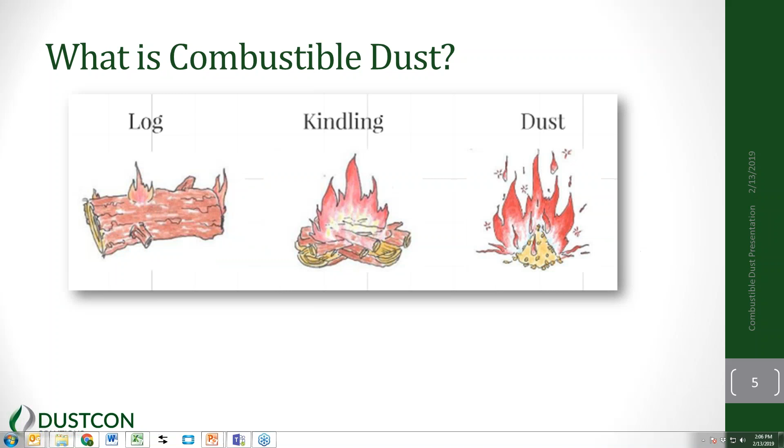All right, so let's jump right into what is combustible dust.

A good analogy for the combustible dust problem is to envision a log burning, maybe in a fireplace at home or at a campfire. Most of us have experience with this. We understand that the log burns, it gives off heat over a long period of time, but it's not particularly easy to ignite. You can't just take a match and light it up immediately. So what we end up doing is we chop some of that wood into smaller kindling, or we find some leaves or something with a little more surface area, something we can use a match to light. It gets going and provides that starting heat for the log to begin burning.

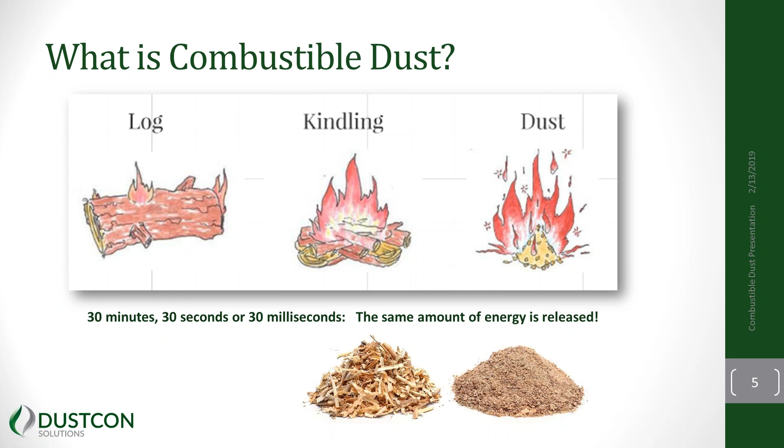Now, if we extrapolate that out even further, we talk about chopping that kindling down into a real fine powder or a fine dust. We go out to the parking lot, disperse it into the air, and light it up. You'll see that it ignites and burns almost immediately. That's because the amount of surface area plays a huge role in how quickly that occurs. So the key thing is that it's about how much mass there is within your combustible dust that determines how much energy is released. And if you release that energy much more quickly, it's going to do more damage.

So when we define what a combustible dust is, you'll see that most publications will talk about the range below 500 microns as what we consider to be dust. So if you've got a finely divided particulate solid below that 500 micron level that can burn, that can pose a flash fire or explosion hazard when it's suspended in air, that's what you're going to be labeling as combustible dust. Now this can be any number of things.

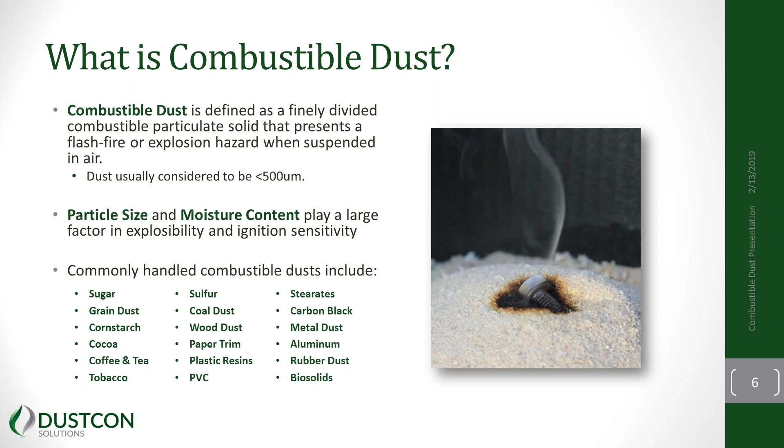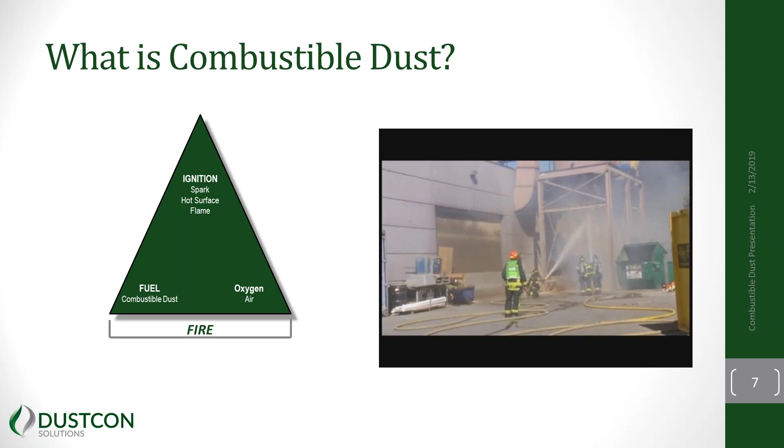What you're going to see now is we add one more leg to what we call the combustible dust pentagon, and that's dispersion. The water jets that they're using have actually allowed the combustible dust that's already burning to be dispersed in the air below that vessel. And it creates this flash fire, right? You can see the power of it. You can see how these guys are engulfed immediately. Now, luckily, they're wearing their fire retardant gear, and they're able to survive this incident. But if, let's say, the firefighters aren't wearing their PPE, that could be a real problem.

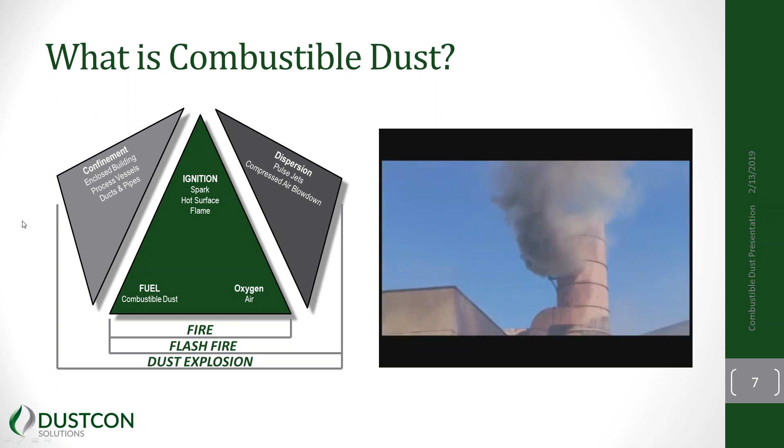But this still isn't what we call an explosion. And the reason for that is that an explosion requires confinement. It requires a vessel, a building, or a compartment to be ruptured. And that comes from the pressure that's generated within that confinement. So this is going to be the key thing that we remember as we go through the hazard analysis process of the combustible dust story.

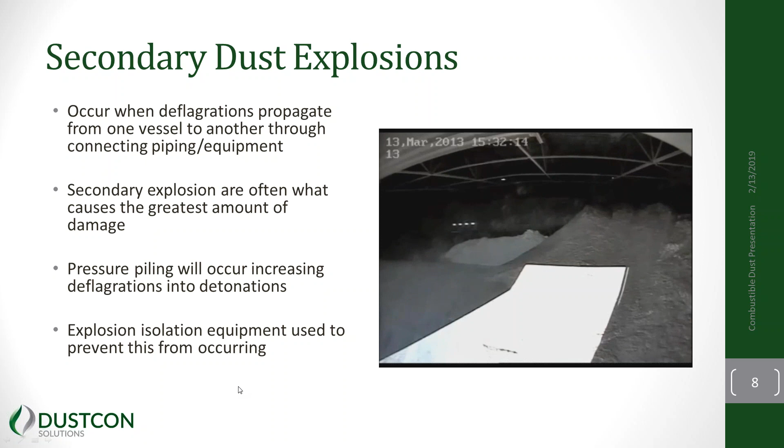So taking a look at secondary explosions, this is another thing that gets widely talked about when it comes to combustible dust, because it's not the primary explosion that typically does a lot of the damage, it's the secondary. Taking a look at this video, you can see the way the flame ball comes out of where it originates, you can picture that vessel there in the way far back of the frame. It's very difficult to see where the flame ball originates. You can see that it travels all the way across this warehouse where you've got fine wood dust being stored. And on top of those rafters, all that material is shaken loose. It falls into suspension by that pressure wave that precedes the flame front, and it's going to entrain itself into the air so that there's more opportunity for propagation.

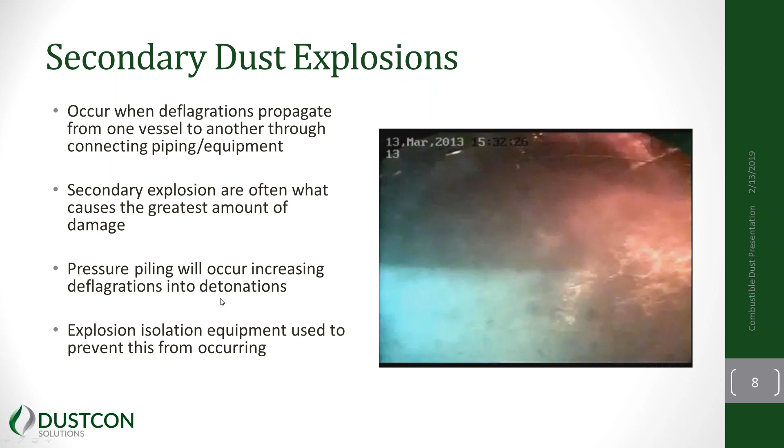Now, you may see 1/32 of an inch, 1/16 of an inch. These are different measures that are defined by the NFPA guidelines or other guidelines telling you how much you need to watch out for.

Me personally, if I can write my name in it, if I can't see through that layer of dust to whatever the underlying equipment or handrail is, that's when it's time to take a look and make sure our housekeeping is in order and we're getting it taken care of.

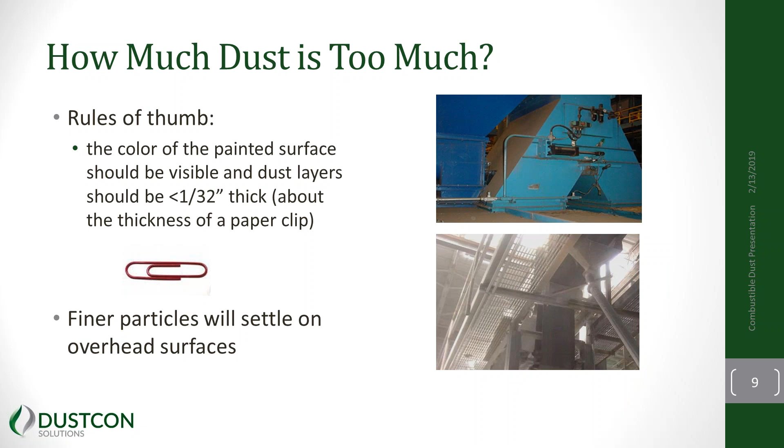Finer particles are going to be the ones that are actually more dangerous. As noted earlier in the presentation, the more surface area you have, the quicker combustion is going to occur, so the more dangerous that dust is going to be. It's those finest particles that actually suspend up into the air and settle out onto the rafters, above overhead equipment, and things like that.

So, are there any questions regarding the basics of combustible dust? If you have any, please ask them here in the questions tab, and I can answer them later on in the presentation.

We're going to move on to NFPA and what the requirements are there. Those of you here in North America will remember that in 2008, when the Imperial Sugar explosion occurred, this happened, ironically enough, just after OSHA issued its first national emphasis program on combustible dust.

The CSB, or Chemical Safety Board, and other agencies have been doing a lot of work collecting data on the loss history of combustible dust in our industries. OSHA had taken note, put out its first national emphasis program prior to this explosion, and then reissued that national emphasis program after the Imperial Sugar disaster occurred.

Now, since then, they've been citing the NFPA documents and the general duty clause as the ways in which they're enforcing this. Internationally, you may be looking at building codes, or if you're in Canada, maybe your province-specific safety agencies, and they're also going to be focused on the NFPA standards. If you go over to Europe, you might be looking at ATEX or some other standard as well. But for that reason, we're going to focus on NFPA 652, which is the newest document that's been released with regards to combustible dust.

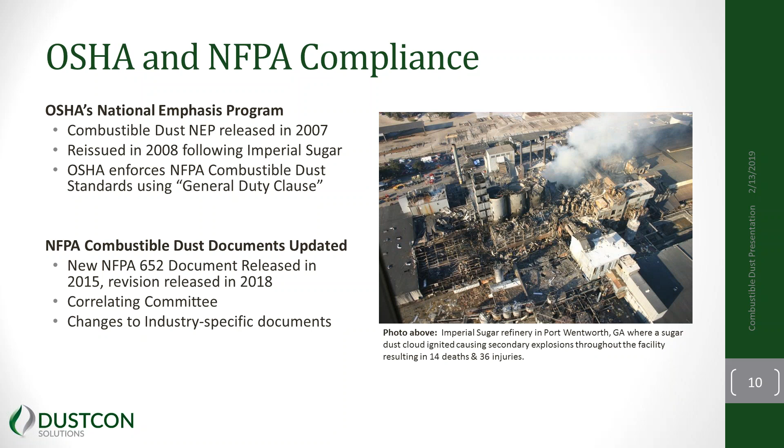So when we talk about the requirements for NFPA when it relates to combustible dust, we're going to focus on a couple of things. First, you're going to determine whether or not the material you're handling is combustible, using Chapter 5 to do that. Second, you're going to want to identify and analyze all the hazards that you have related to combustible dust. That's where the DHA comes into play, that's Chapter 7, managing those hazards using a combination of engineered and administrative controls.

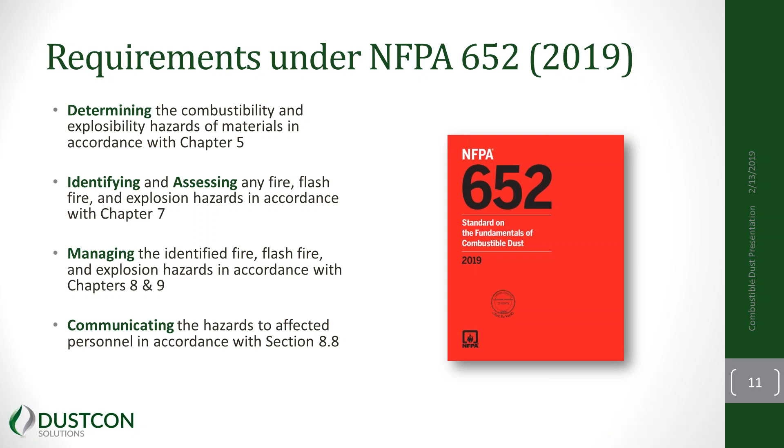We're going to take those identified fire and explosion hazards, and we're going to do something about it. And then finally, we want to communicate the hazards to the affected personnel. We want to train our employees, make sure contractors are aware of what's going on. That's going to be the best way to prevent incidents moving forward.

So there's two ways to determine whether or not your material is combustible or explosible, through Chapter 5 of NFPA 652. The first is using industry published values. You can see here on the right, this is just a couple of the values that you might find for plastic dusts coming out of the NFPA 652 document. As you can see, they provide you with your Pmax and your KST data right there, and it lets you know what the median diameter of the particle was, so that you can make sure that the material you're handling is going to be represented by that data.

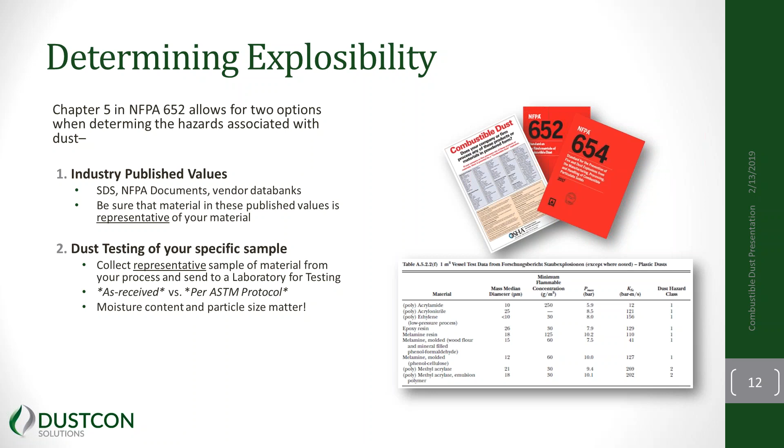Now, the other way to do this, if you cannot find data that works well for you in the published values, is to test your dust yourself. This is going to be important, especially to make sure that when you test that dust, it's representative of what you're actually handling. We don't want to just take a scoop out of the super sack that's coming in if there's a chance the material could be degraded downstream, or that there's going to be mixing involved. It's going to be very important that you work with us at DustCon Solutions, or somebody else who's got knowledge of the specifics of combustible dust hazards, to ensure that you're testing this material appropriately.

You can do it as received or per ASTM protocol. Those are things that you're going to want to get into—do you have good control over particle size and moisture content, or should you be looking at a worst case scenario for your dust?

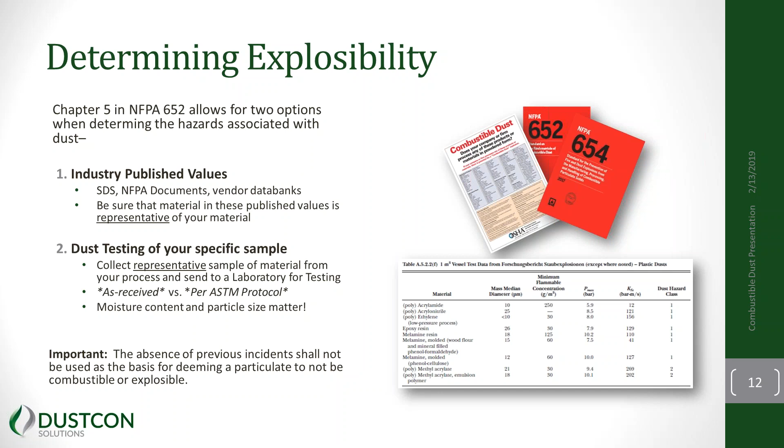It's important to note that the absence of previous incidents should not be used as the basis for saying that your dust is not combustible. Just because at your sawmill you've never had an explosion doesn't necessarily mean your wood is not combustible. It's simply not the case.

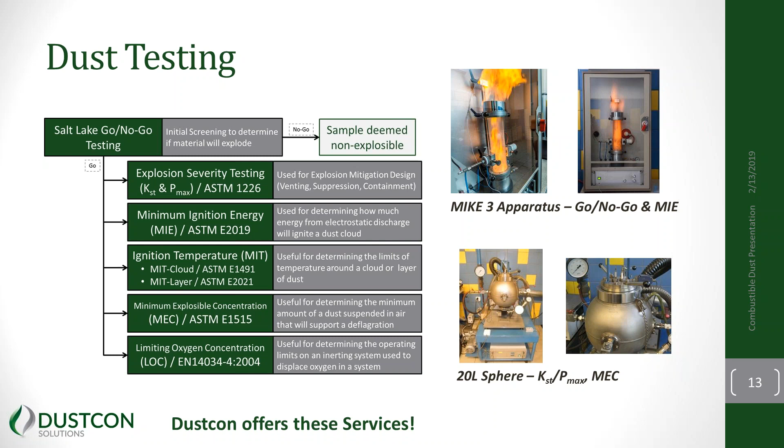A dust hazard analysis is the next part of that NFPA requirement in identifying and analyzing your hazards. A dust hazard analysis is simply a review of your process, going through each point, each room, each vessel, determining where your explosion or fire hazards are possible, and identifying at what points you've got safeguards in place already versus where you need additional safeguards.

The term dust hazard analysis was coined by the NFPA 652 committee, done so to distinguish it from the process hazard analysis associated with OSHA's PSM. It's a retroactive requirement for all facilities, regardless of when the facility was built or what the standards were at the time. That means all facilities handling combustible dust now must have a DHA completed by September 7th, 2020. However, in the food and wood industries, those specific documents have carved out later dates for their constituents to have the DHAs completed.

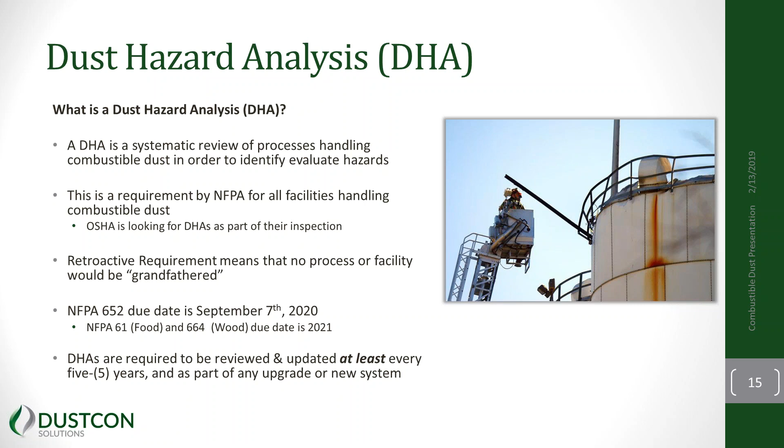Additionally, you're going to want to update those DHAs at least every 5 years, or if you make upgrades to your system or add a new system.

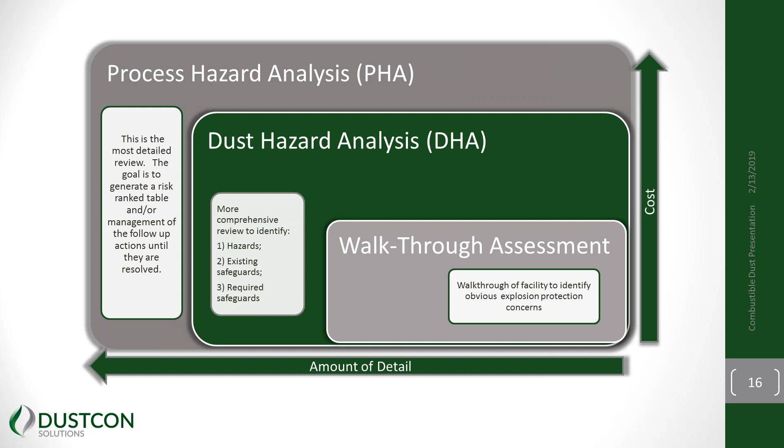A DHA is going to be different than the process hazard analysis found as part of OSHA's PSM, but it's also more than just a walkthrough assessment you might get from an explosion protection manufacturer. The DHA focuses not only on the equipment in the plant, but also on your administrative controls like training, hot work permitting, things like that. So it's going to be a little less detailed than a process hazard analysis, but more detailed than just a walkthrough assessment.

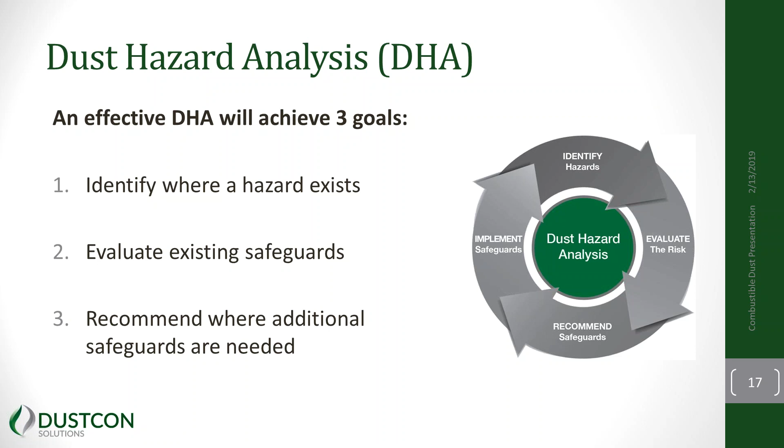The steps to a DHA: we're identifying where the hazards are, evaluating what existing safeguards are already in place, and then measuring whether or not those existing safeguards are adequate to meet the risk level you're looking at. Recommendations are made, and those recommendations should ultimately be implemented. We do it in a cycle every 5 years.

A dust hazard analysis should be done as part of a team. We want intimate knowledge not only of the regulations and the hazards themselves, but also of the process being analyzed. So you're going to want to use your plant engineers, sometimes your operators, sometimes your maintenance, your safety staff, your administration. But you should always have somebody leading the effort who's what's called a qualified person.

A qualified person is kind of an ambiguous term set out by the NFPA. In their words, it's somebody who has experience with combustible dust hazards and has experience leading a DHA. So it's not like you can just ask for a certificate from people who might be offering to work on your behalf as the DHA qualified person—you really need to look at the credentials of the person you're going to hire. In most cases, it makes sense to hire an expert, since smaller organizations often don't have the resources for somebody to be an expert in the field of combustible dust safety.

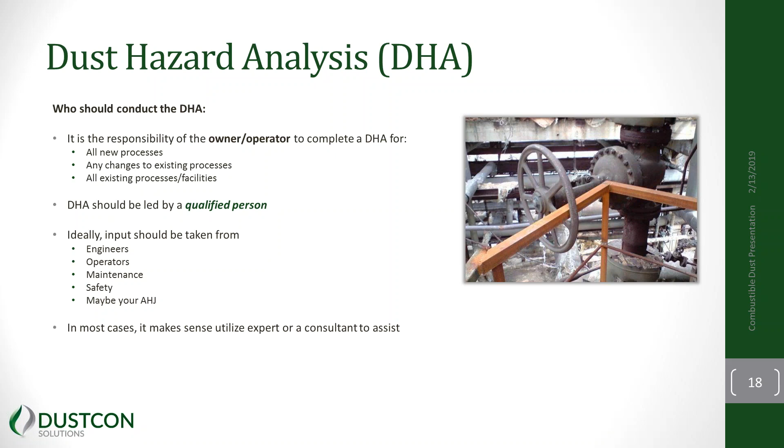So it's very important that you ask for references, for sample DHA reports, and check out the accolades that the person claims when they're asking to work on your behalf to complete a DHA.

When we go through the DHA process, this gives you an idea of some of the more common places we're going to be looking to find hazards, at least when it comes to vessels that we're looking at. The data on the left comes from FM's property loss data sheets published in 2008.

They show that over half of incidents involving combustible dust, fires, and explosions involve the dust collector. And the reason is we've already got 4 of those 5 legs of the combustible dust pentagon present at any given time. We're bringing in our combustible dust with air, our oxidant. We're enclosing it in the dust collector, and in most cases, we're using pulse jets to shake that dust, to disperse it into a cloud.

So all it takes is that ignition source to get into the dust collector, and there you go, you've got your incident. Bucket elevators, mills or grinding equipment, storage silos and bins, spray dryers—these are all going to be very common places that we're going to be looking for combustible dust hazards within the process itself.

And then over on the right, we've got a list of ways that we can mitigate those deflagration hazards. You can think of things like explosion venting or flameless venting, which are passive approaches. You can look at explosion suppression, which is a way to put out that deflagration before it has a chance to build enough pressure. Oxidant concentration reduction, sometimes thought of as inerting, using nitrogen or carbon dioxide or argon, something to keep your oxygen concentrations low enough that you can't support a deflagration in the first place.

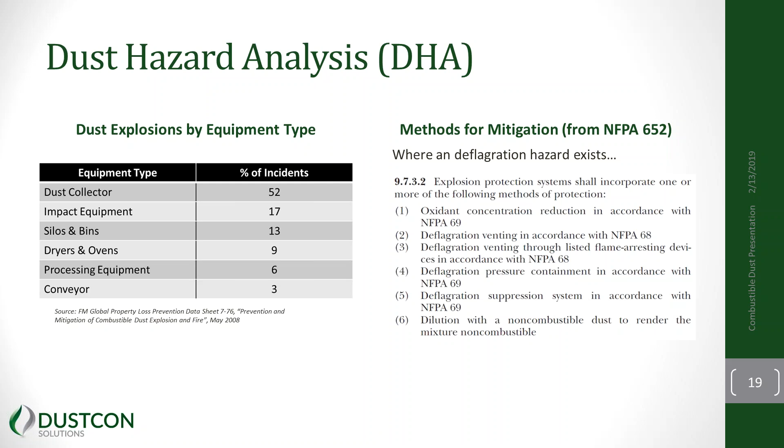So what I want to do now is just quickly go through an example of how you might analyze one particular node within a dust hazard analysis. You can see here I've chosen a central dust collector pulling off of a blending or a polyethylene pellet production and blending process. You can see that we do have combustible dust being pulled into this dust collector.

We've got it confined and suspended, as I mentioned, with the pulse jets. The MEC within a dust collector like this is almost always going to be exceeded because those finest particles are being kind of recycled into and out of the filter bags.

And then we take a look at what our credible ignition sources are. In this particular case, the additives used in the compounding process are going to have pretty low MIE, or minimum ignition energy values, meaning that the risk for static ignition is actually moderate. If we have an electrostatic discharge, we could end up with ignition.

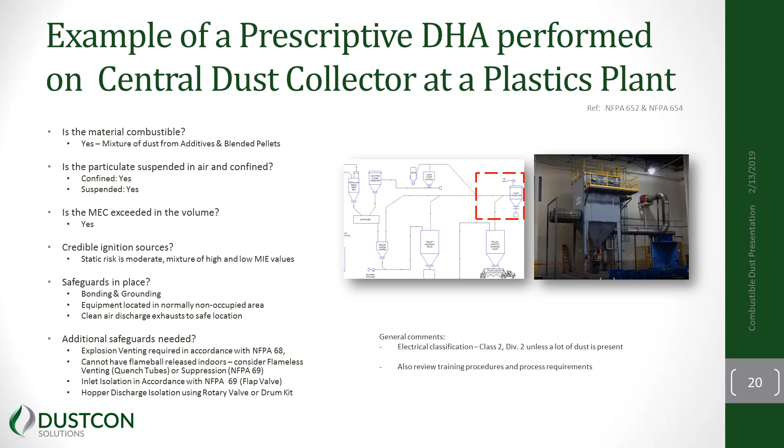Some other things to think about: you want to take a look at those procedures and make sure that hot work permitting is in place. Also, how well is this dust collector sealed up? Do we need to classify the area if there's lots of fugitive dust escaping, creating maybe a Class 2 Division 2 environment?

Some other things to consider—we talked a little bit about housekeeping earlier in the presentation. Management of change is a big one I've not touched on recently, but managing your changes is going to be crucial in making sure that additional hazards are not added in between the DHA cycles. And then preventative maintenance is something that can oftentimes help to minimize the risk of ignition.

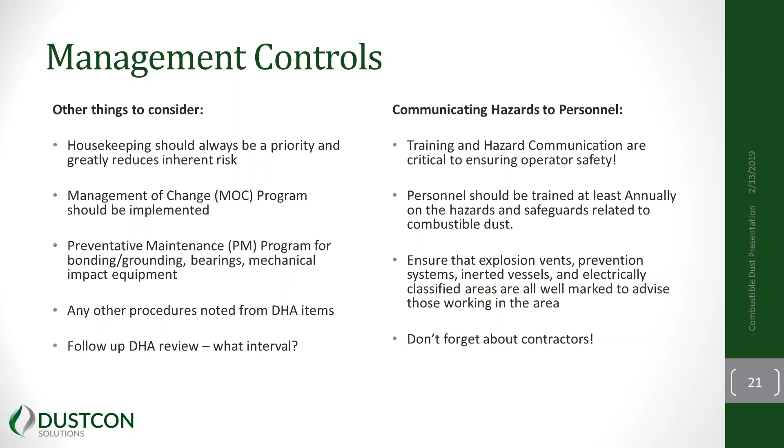Communicating hazards to personnel—always make sure that you're not only looking at your employees alone, but also your contractors. They should understand what the explosion protection systems in your plant are, why they're important, and why it's important to follow the different procedures related to combustible dust and what the consequences might be. All of those things, taken together, can help minimize the risk that somebody takes action unwittingly to undermine those programs that you have in place.